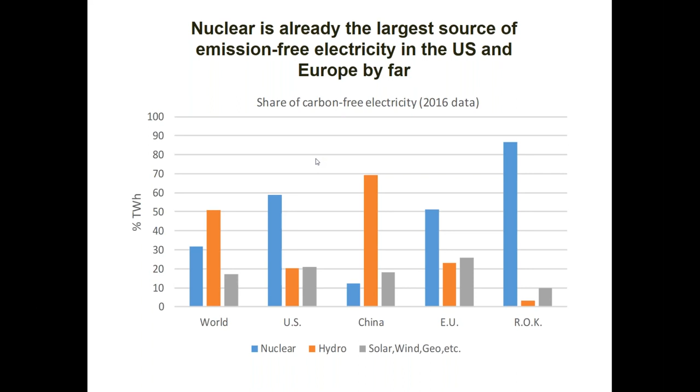And you can see on a global level, hydro takes about half of the carbon-free electricity, followed by nuclear at about 1/3, and then less than 20% for solar and wind. But as I said, in places like the United States or Europe or even the Republic of Korea, nuclear takes up already a much greater fraction. So it is very much an important component of the carbon-free electricity mix right now. So let me move on.

It's interesting also to look at the correlation, if you wish, between the use of nuclear, hydro, solar, and wind to the carbon intensity in the power sector. So I'm going to define carbon intensity in a minute, but first, let me explain what you're looking at now. These are obviously the list of European countries, and they are ranked according to the share of essentially solar and wind generation over a period of a little bit over 1 year, between 2016 and 2017. This is not capacity, this is actual generation.

Over that period of time, the average share of electricity from solar and wind in Europe was about 20%. That's the yellow line that you can see here. And there were 6 countries that were at or above that average. They are Denmark, Ireland, Germany, Portugal, Spain, and Finland. These, by definition, are the countries that have invested the most in renewable energy, particularly solar and wind.

The next plot here shows the same countries, all the European countries, but now they're ranked according to their carbon intensity. Carbon intensity is the amount of CO2, carbon dioxide, that is emitted per unit electricity generated. So the figure of merit here is grams of CO2 per kilowatt hour. And you can see that the 6 countries with the lowest carbon intensity in Europe are Norway, Sweden, France, Switzerland, Finland, and Belgium. So if you compare the group of countries that have invested the most in solar and wind and the group of countries that actually have achieved the lowest carbon intensity in the power sector, you can see that there is basically no correlation.

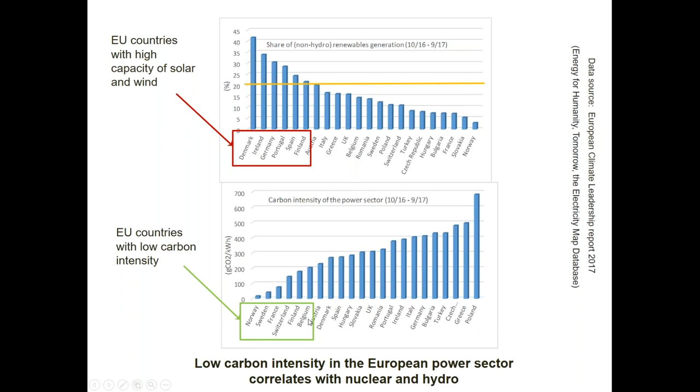Let me move on to the next slide. So we do have this fleet of nuclear power plants, and in many cases, these plants are approaching the end of their original license. You may know that nuclear power plants are typically licensed when they're built to last for 40 years. There is now a trend, I think, worldwide to extend to 60 years. That has happened extensively in the US. It's probably happening in Europe and in Asia.

And actually, here in the United States, we also have a few plants that may extend from 60 years to 80 years. But once you get to this sort of decision point, the question is, are we going to decommission or are we going to extend the license? So if you decommission, there are certainly some downsides to this. The first is you lose the jobs and tax revenues that are generated by these plants.

This is particularly important for plants that are built in areas that are economically not particularly developed. Particularly the states here in the US or regions of Europe place high value on the fact that nuclear power plants employ a lot of people. These are well-paying jobs, and they also pay a lot of local taxes. So you're going to lose that.

And we have examples here in the US and elsewhere of carbon dioxide emissions increasing if nuclear power plants shut down. In the US, we had, as of now, 3 or 4 plants that have already shut down: Vermont Yankee in Vermont and San Onofre in California. And when those plants were shut down, the annual emissions in the power sector of those states went up. This is fairly obvious to understand.

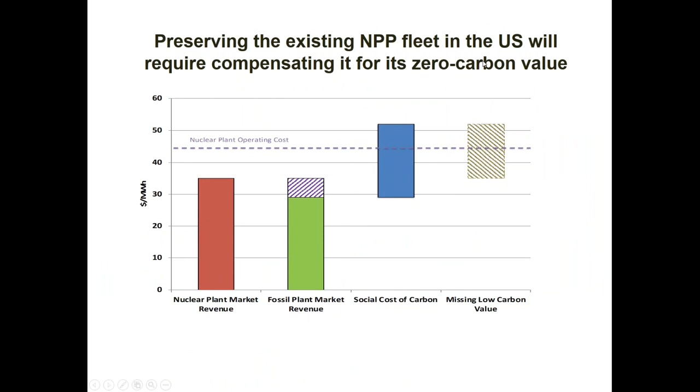This is the calculation for the United States. I'm not going to get into the details here. In the US, the issue is not necessarily the extension of the lifetime of the nuclear power plants, because in some cases they've already been extended by 20 years. The issue in the US is that many nuclear power plants, particularly in deregulated electricity markets, are losing money. Essentially, they're producing electricity at a cost that is slightly higher than the price of electricity in that market, okay? And so they are unprofitable.

So in the case of the US, again, without getting into the details of this graph here, we calculated that a credit, it's called zero emission credit, given to nuclear power plants in the amount of between $12 and $17 per megawatt hour would essentially make our entire fleet of nuclear power plants profitable, and it would therefore allow it to continue to operate for the next 20 years.

Similar calculations have been done by individual states in the US, New York, Illinois, New Jersey. They have reached the exact same conclusions, and so in those 3 states, as of now, the nuclear power plants are actually receiving a small subsidy of between 15 and 20, I think, dollars per megawatt hour to ensure that they are profitable and they can continue to operate. This is done in the name of avoiding emission increases that would be certain if you shut down the plants and replace them, as I said, with other capacity.

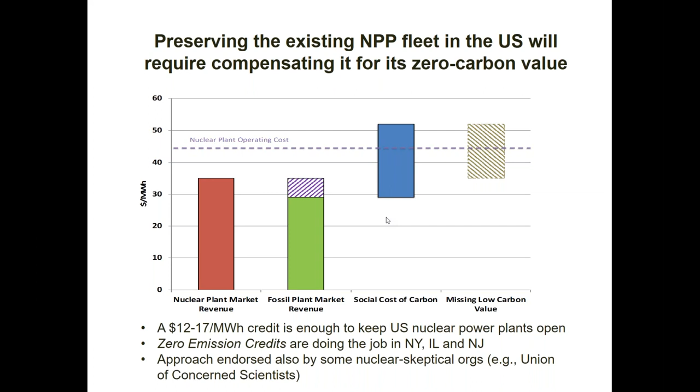So that's the discussion that we've had so far is about the existing fleet. Now, if you look down the road over the next 20, 30 years, the question is, do we need to build more nuclear? And so here we're now talking about deep decarbonization.

You see, it's actually fairly straightforward, particularly for countries that start with a mix that is highly carbon intense. Emilia is from Poland. Poland uses a lot of coal. They have very high carbon intensity in their power sector. For a country like that, simply switching from coal to natural gas will significantly reduce the carbon emissions. Significantly means maybe a factor of 30–40%. You can also bring some solar and wind capacity online that will further reduce the emissions.

But if you are interested in deeply decarbonizing the power sector, which is very much needed if we want to ultimately address climate change, global warming, etc., then our analysis shows that you actually need more than just solar and wind, and certainly you need to ultimately get away from natural gas and coal.

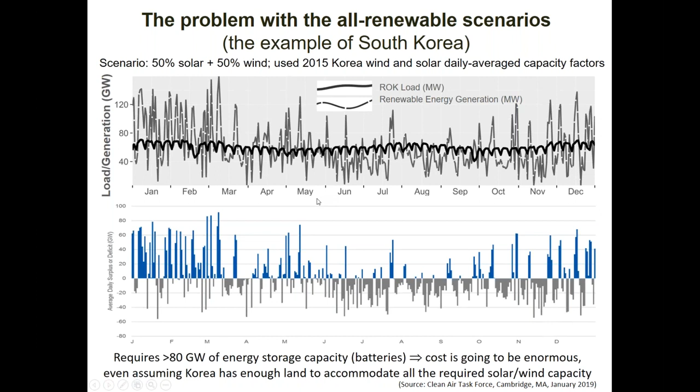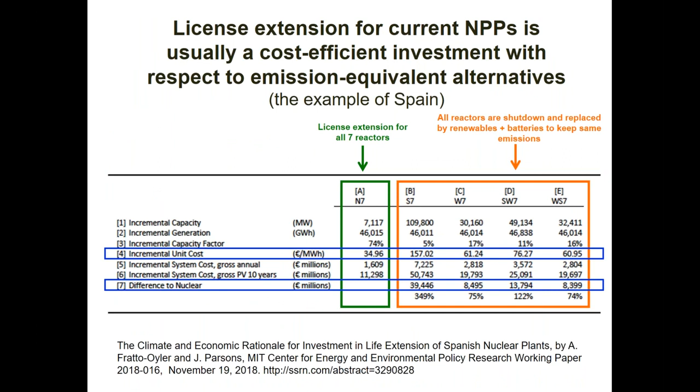Please. Yes, hello. My question was about the comparison between decommissioning or extending the life of the nuclear power plants. In your opinion, if we start decommissioning nuclear power plants, will this push to build new ones, or will there be no correlation? I think in most cases there will be no correlation because the financial decisions are somewhat independent, but there are exceptions.

For example, the two examples that come to mind are actually both in Europe. In the UK, the policy of the government is to replace nuclear with nuclear. So as the old AGRs, the advanced gas-cooled reactors that were built in Britain 30, 40 years ago, are coming to the end of their lifetime, they will be decommissioned, and that will automatically open the door to new construction in the UK.

And similarly in France, they have capped their total capacity to something like 56 gigawatts, or maybe higher than that, I forgot. But there is a cap on the total nuclear capacity in France, and there too, for new nuclear plants to be brought online, the policy is that older nuclear plants have to shut down.

But with these two exceptions, for example, in the United States, the decision right now is whether to decommission or extend the license. The question in the US, at least as of now, is not, do I want to build new nuclear power plants? Because quite frankly, with natural gas prices as low as they are in the US, nuclear would not be cost competitive. Unless, as I explained a minute ago, the decision is that we want to decarbonize further from where we are now. The current Trump administration is not interested in that, but maybe the next administration might be, in which case new nuclear might be again on the table.

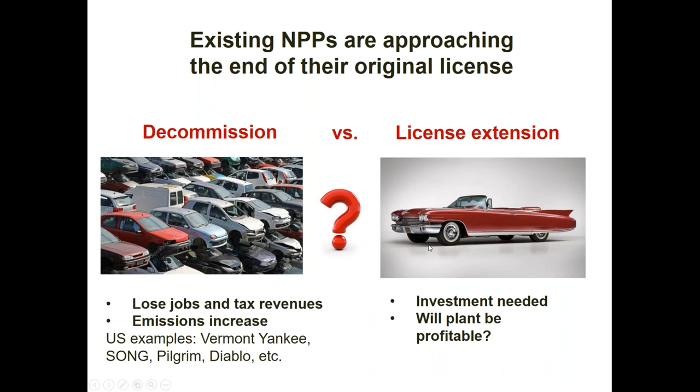Does that answer the question? Yeah, thank you. Okay. Good questions. Emilia, if there are no other questions on this, let me move on because I'm aware of the time.

I want to now tell you, this is going to be a little bit more technical. If we were to build new nuclear power plants, what would they look like? So this is the topic of advanced nuclear technologies. In the study, we analyzed essentially every new nuclear reactor concept out there. There are the so-called small modular reactors.

They almost invariably are based on light water reactors, either PWRs or BWRs, but they're smaller and they can be built maybe in factories, which theoretically could reduce the cost. And also from a financial point of view, it's a little bit easier to build smaller plants than to build larger plants because the capital at risk is lower.

Fairly proven technology, even though it has not been demonstrated at this small scale extensively, but you're talking about PWRs, BWRs, and so all the materials, all the fuels, all the components are essentially proven from decades of operations in existing plants. So that's the first category that we looked at.

The second category would be the Generation 4 systems, and in our evaluation of the 6 or more different concepts that people are investigating within the Gen 4 group, the one that has the most promise and is basically ready now is the high temperature gas-cooled reactor. So this is a very different beast, so to speak, from PWRs and BWRs.

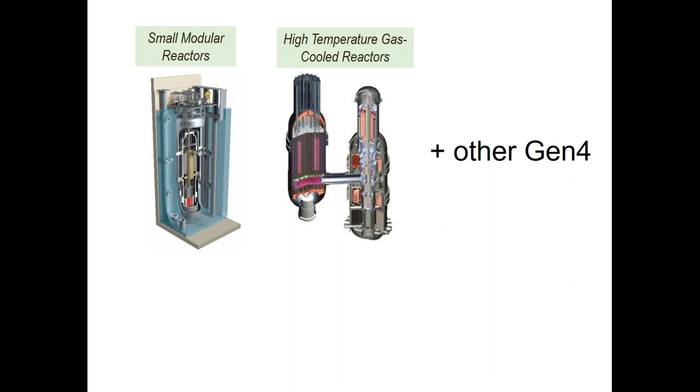In the illustration you see on this slide, the power conversion cycle would not necessarily be a Rankine cycle, a steam cycle, but it could also be a gas turbine. So you can achieve higher efficiency of conversion from heat to electricity, and the reactor has a very interesting safety profile. There are, of course, other Generation 4 systems, but we judge those systems not to be ready now, the same way that high temperature gas reactors and small modular reactors are. So our analysis has focused mostly on these two groups.

Now, traditionally, nuclear has been used for base load electricity. Pretty much that's the only application we've seen other than propulsion in naval reactors, submarines and carriers. But in the civilian domain, they've been used for baseload electricity.

What's interesting and exciting about these new technologies being considered is that they open up a richer set of potential missions. You still have, of course, cheap electricity generation. Because of the presence of renewables, all new nuclear power plants are probably going to be expected to be flexible operation capable, meaning being able to follow the load to an extent. But what's interesting in particular about the high temperature gas reactor is that now you can think about coupling a nuclear reactor not just to the electric grid, but also use the heat at high temperature for industrial applications.

Things that come to mind could be the production of chemicals that require heat at 500 or 600 degrees C, or even the production of synthetic fuels for transportation. Hydrogen is being considered, of course, for fuel cells and cars, and hydrogen is not a primary energy source, so it has to be produced using a primary energy source. You could do it with nuclear, but it's done efficiently if you have a nuclear reactor that operates at high temperature.

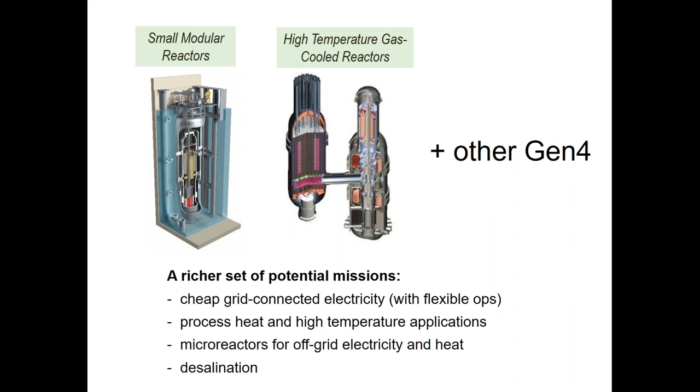We did look at the nuclear heat potential in the United States. You can see a list of applications: refineries, chemicals, minerals, pulp and paper, and others. We used several filters: we looked at the EPA database for U.S. sites that would emit a certain amount of carbon per year, sites that would require a significant amount of heat, say 150 megawatts, and we made the assumption that nuclear heat could be delivered at maximum 650 degrees C, consistent with high temperature gas reactor technology.

By applying these filters to all sorts of industrial plants in the United States, we found that nuclear could capture today about 150 gigawatts of heat, which is significant.

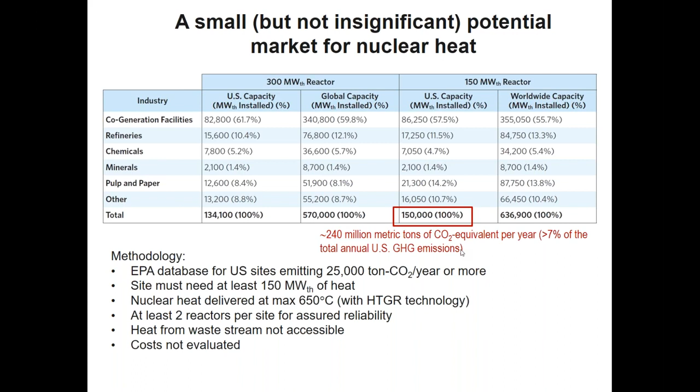It's a relatively small fraction of the total heat market, but it is significant in absolute terms. And again, this does not include the use of nuclear for synthetic fuels or hydrogen for transportation. In that case, you would need a lot more than this. But it was interesting to see that even now, nuclear could penetrate these heat markets quite effectively.

Let me move on. The other value that these new technologies bring to the table is their safety profile.

So going forward, as we design new technologies, I think we have a new set of goals in the area of safety. For the existing nuclear power plants, let me say a couple of words about those. For the existing fleet, the big lesson learned from Fukushima was that you have to be able to cope with a station blackout without damaging the core. There has been a lot of activity in retrofitting existing plants with additional equipment and additional energy sources that would allow extending the coping time for a station blackout at the existing fleet, and that is taking care of at least the existing fleet.

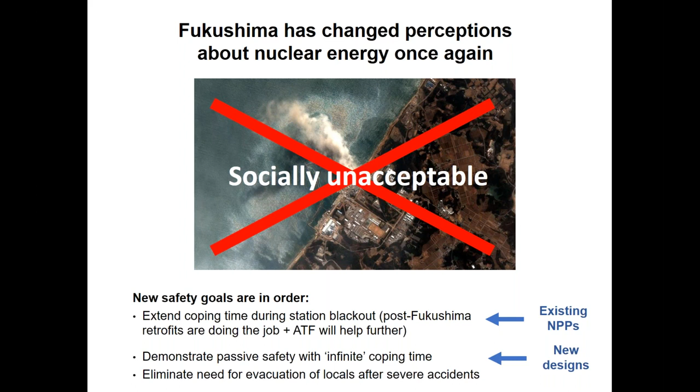So the two options that I mentioned, the high temperature gas reactor and the small modular reactors, actually do bring a very interesting safety profile to the table. They all have what we call inherent safety attributes. In the HTGR, there is no coolant to boil, so you don't run out of coolant because it cannot boil off. The fuel, this is absolutely key, has very high retention of fission products, even under the most horrendous postulated events.

There is a very high thermal capacity in the core or in the system for both small modular reactors and high temperature gas reactors. So the system is able to absorb a lot of heat without exceeding temperature limits. And the reactivity coefficients, the inherent neutronic features of the reactors, are such that the plant shuts itself down if something goes wrong.

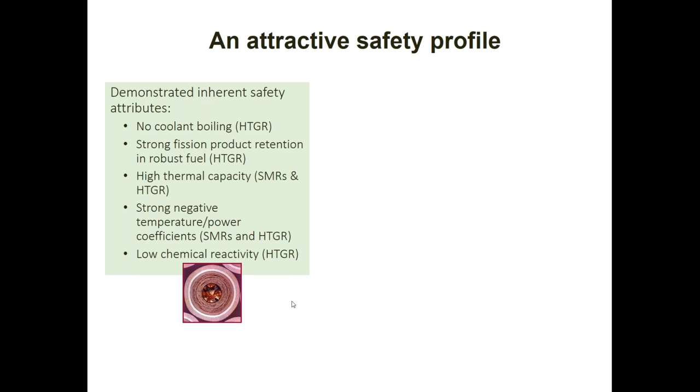If you couple that with engineered passive safety systems that do not require AC power and other intervention from outside, we concluded that these new technologies basically allow you to eliminate the need for emergency power, at least safety grade emergency power, and extend the coping times for station blackout enormously. They are all much simpler to operate, which is good in terms of reducing the number of initiating events.

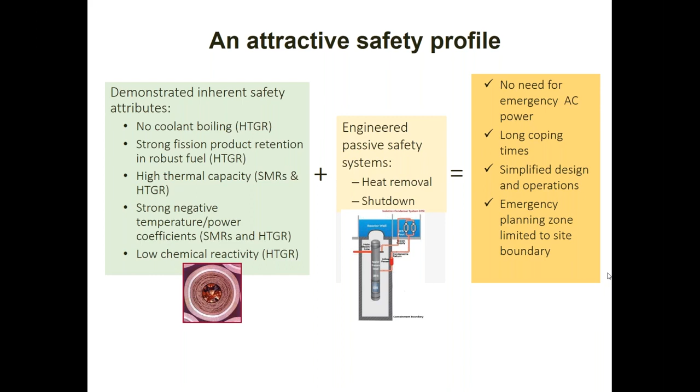Last but not least, the source term of radionuclides is such that even under severe accident scenarios, we think that the emergency planning zone, the so-called evacuation zone, could be limited to the site boundary, which means by definition local residents will not have to be evacuated. This set of attributes is being discussed in the US with the NRC, our nuclear safety agency, within the context of the design certification of NuScale, a small modular reactor based on PWR technology.

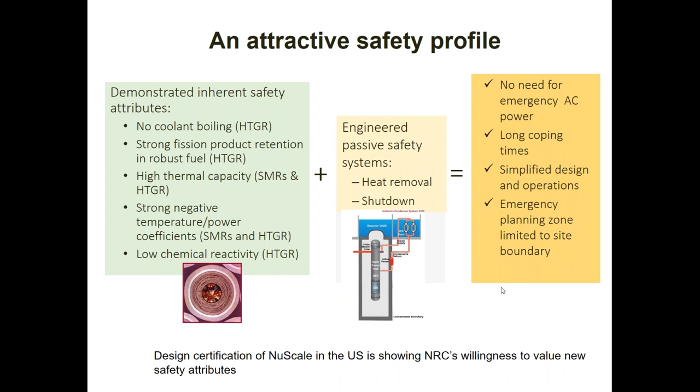And the NRC is indicating a very strong willingness and openness to value the safety attributes of these new reactors. So I think I'm hopeful that within a couple of years, we'll have a design certification for NuScale here in the US that essentially recognizes these good attributes for these new technologies.

Let me come to an end by telling you a little bit about how to reduce cost of nuclear going forward. I showed that economic analysis at the beginning. It makes certain assumptions about the cost of new nuclear. There was a question about construction and decommissioning. They're all included, but of course we had to make some assumptions on what those costs are. And the current practice in the US and Western Europe, if you look at some of these new construction projects, they are too expensive. They're taking too long to build, and even once they're built, they're just very, very expensive.

So we spent a lot of time in the study trying to identify ways to reduce the cost of new nuclear. And some recommendations are obvious, others are less obvious. So let me just very quickly walk you through this one. First, the first is kind of obvious.

A lot of the cost of nuclear is about re-engineering the plant for site-specific requirements. So you change, the plant is nominally the same, but if you change site, you're going to have to do different engineering. And often they're built in 1 or 2 units at most at a site. So the first recommendation is standardize and build multi-unit sites. The more units you can build at the site, the better.

From an economic point of view, there is very strong evidence that the first time the workforce builds the plant, it takes a certain amount of time, a certain cost. The second time they do it on the same site, the same workforce, the cost goes down and the time becomes shorter. And the third time even lower, and the fourth and the fifth. So this idea of having standardized series of reactors built at the same site is powerful, and it can really reduce costs quite dramatically. The other 3 recommendations for cost reductions are more technology-based.

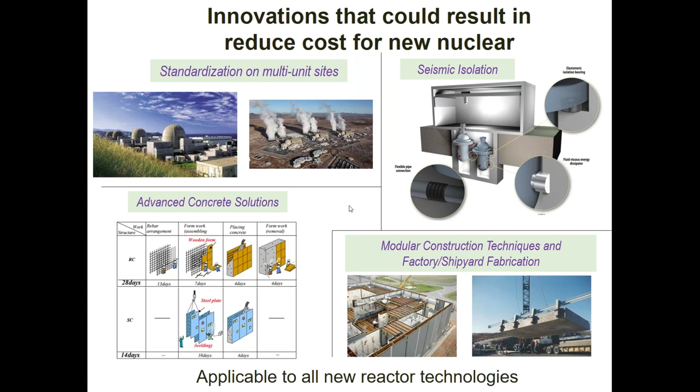So what's interesting about these recommendations is that they are applicable to all new reactor technologies, whether you like PWRs, BWRs, high temperature gas reactors, sodium, whatever it is. These are recommendations that you can use in all those cases, and hopefully the cost will come down.

Okay, I already said this, so I can skip. And let me just close with, let me see, this is the last one. Okay, let me close with this one. This is a comparison that we made between the nuclear industry and many other industries of similar complexity.

So you see here, you have nuclear plants, coal plants, offshore oil and gas, chemical plants, satellites, jet engines, pharmaceuticals, automobiles, robotics. And we group these different industries according to 4 categories. The first category is, what is the scale of the product that this industry is offering? So in the case of a nuclear plant, the product is the plant itself, which is large. But the same goes for coal plants, offshore oil and gas, chemical plants. These are all large structures.

Second grouping, how extensive and rigorous is the testing that is required to receive a license to operate these plants? It's very high for nuclear, very high for satellites, for automobiles, for jet engines, for pharmaceuticals. All of this, if failures occur, they all have high consequences, and therefore they're highly regulated. The third group is, how are these products built? Are they factory fabricated with modular construction, strong supply chains? Things like automobiles, robots, pharmaceuticals, or jet engines, they do have very, very strong supply chains, and they're basically made in factories.

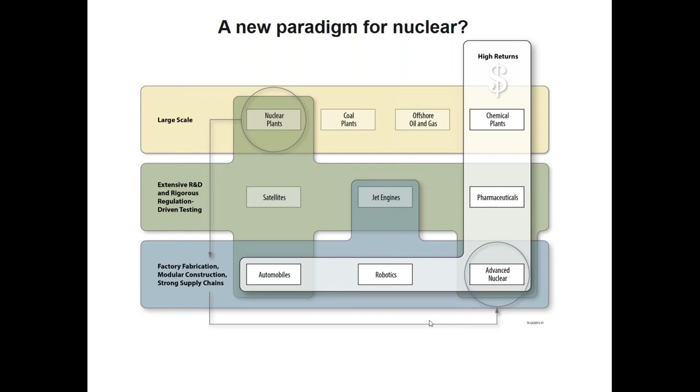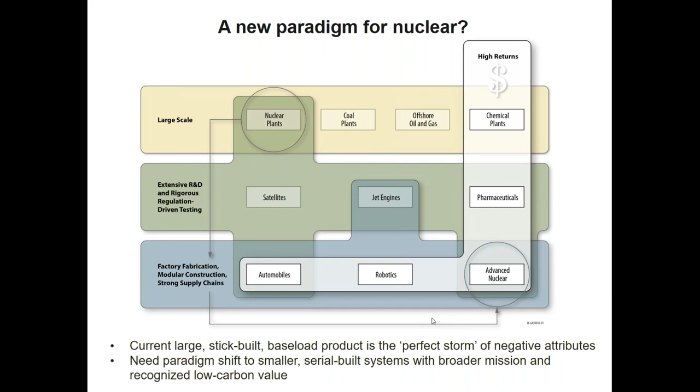So this goes back to the statements that I made about using nuclear heat for niche markets or for industrial processes. So again, I think what nuclear needs to be very, very successful is, I call it a new paradigm, smaller serial build systems with a broader mission and a recognized low carbon value. So let me stop here.

Thank you very much. It was an extremely interesting presentation, also for me, even if I saw some of the slides already before. I have a question here coming from Alfredo Portone. Alfredo, I unmute you now. Can you hear me? I can hear you fine, Alfredo. Yeah. Thank you very much for this very interesting presentation.